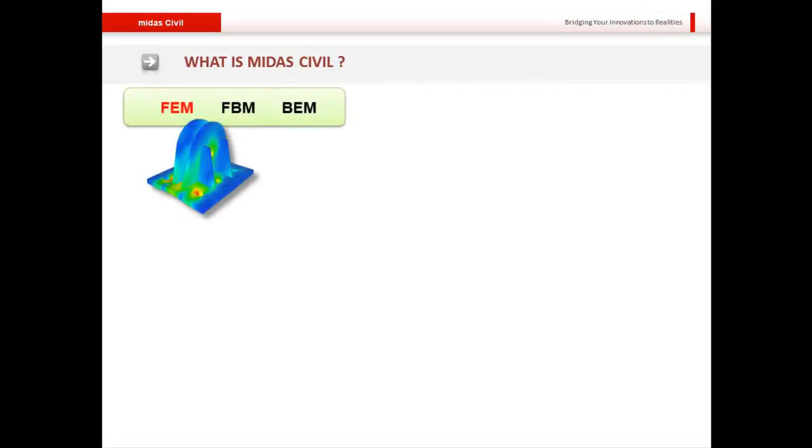So what is Midas Civil? Well, Midas Civil is a 3D finite element based package that is geared towards bridge engineers, but is by no means limited to bridge engineers. It's a general purpose product that can be used to create even models of structures like plant structures, tanks, silos, dams, tunnels, and many other such models. So even a geotechnical engineer can find some use for modeling and analyzing in Midas Civil itself. But of course, it is geared towards bridge engineers, and specific design functions are available for the bridge models only.

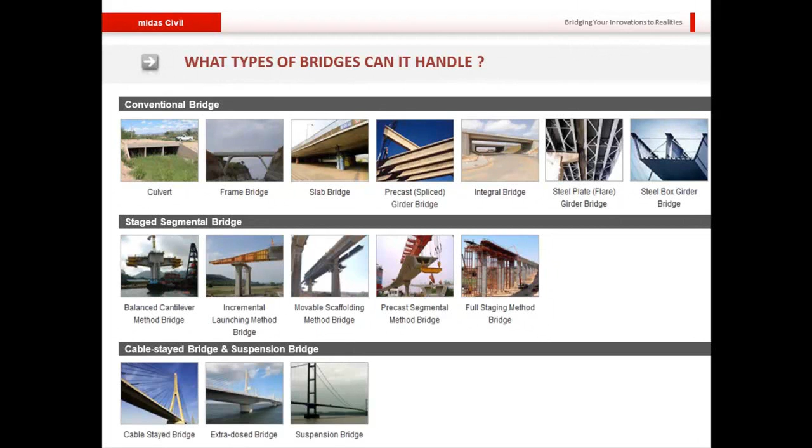So what type of bridges can Midas Civil handle? Well, it can handle quite easily the conventional bridge types like culvert, slab bridge, or girder bridge. It can even take care of staged segmental bridges like the balanced cantilever bridge, precast segmentally constructed bridge, or the full staging method construction for bridges. Each of these construction methods can be easily dealt with in Midas Civil. And finally, Midas Civil is also very adept at handling cable stayed, suspension, or extra dosed bridges.

So coming now to the modeling philosophy. First, I'll talk a little bit about initial sizing. Aside from loadings, the pylon and deck geometry as well as the orientation are driven simultaneously by cost as well as by aesthetics. Normally the loadings only play a part in finding the section dimensions. However, the orientation and overall shape of the bridge is usually driven by the aesthetic requirements.

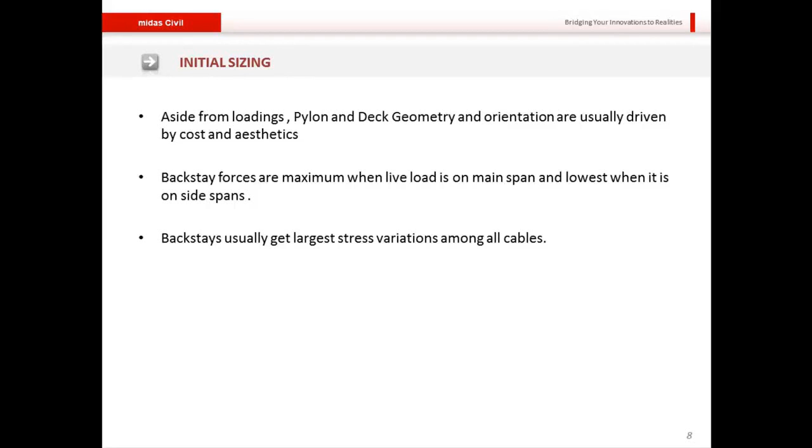Now coming on to the span length, or more importantly the ratio of side span to the main span. This ratio is determined by the backstay forces in the side spans, and the backstay forces are maximum when the live load is on the main span, and lowest when the live load is on the side spans. So the backstays usually get the largest stress variation among all cables, and therefore the span lengths have to be kept such that this variation does not exceed the fatigue strength of the steel material used in the cables.

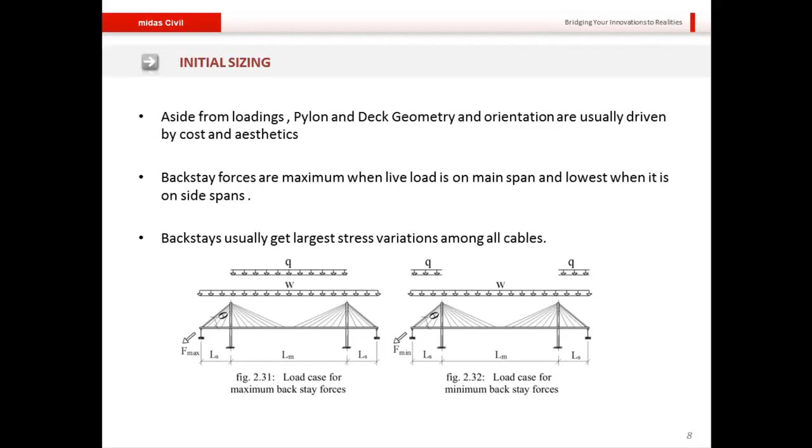This particular graph that I'm showing you is from Gimsing and Georgakis in 2011, where they investigated the relationship between the ratio of the side span and the main span, which they've plotted on the vertical axis, to the ratio between the live load and the dead load, which they've plotted on the horizontal axis. The value of zeta shown above the curves is the ratio between the absolute minimum backstay force to the absolute maximum backstay force.

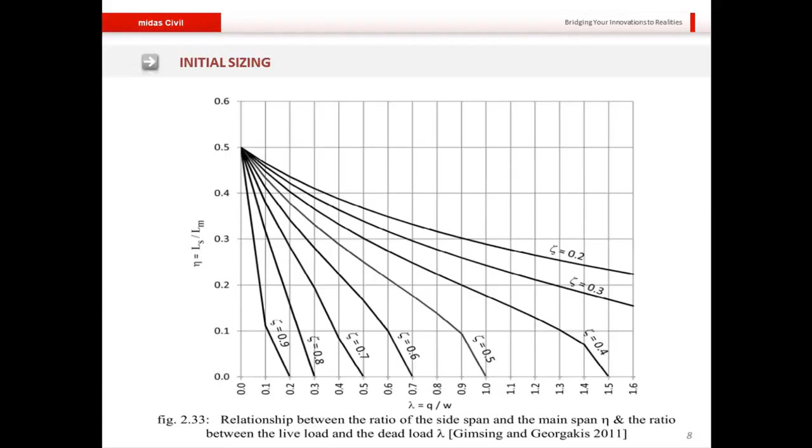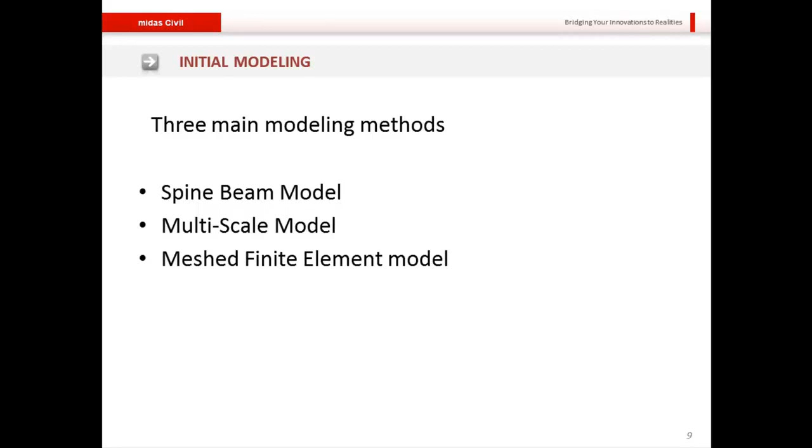Next we'll move on to initial modeling, and here there are three main modeling methods. First we have the spine beam model, we have the multi-scale model, and we have the meshed finite element model.

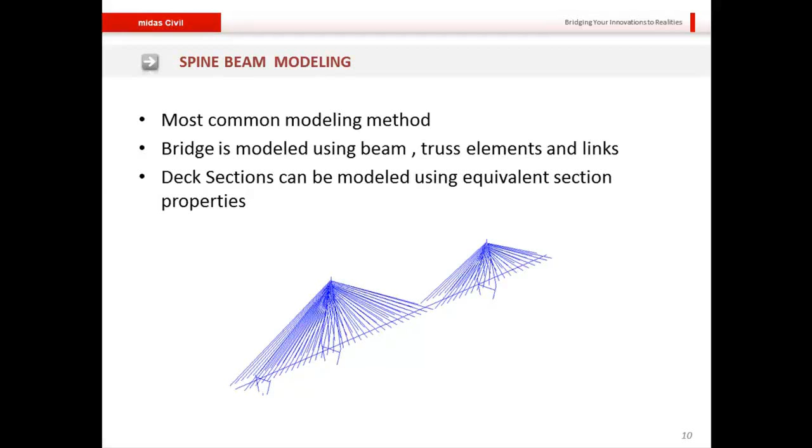So first let me talk about spine beam modeling. This is the most common modeling method, wherein the bridge is modeled using beam and truss elements and links that represent the bearings, and the deck section itself can be modeled using equivalent section properties. So for the deck element, you need not actually go for the entire geometry; equivalent section properties are more often sufficient.

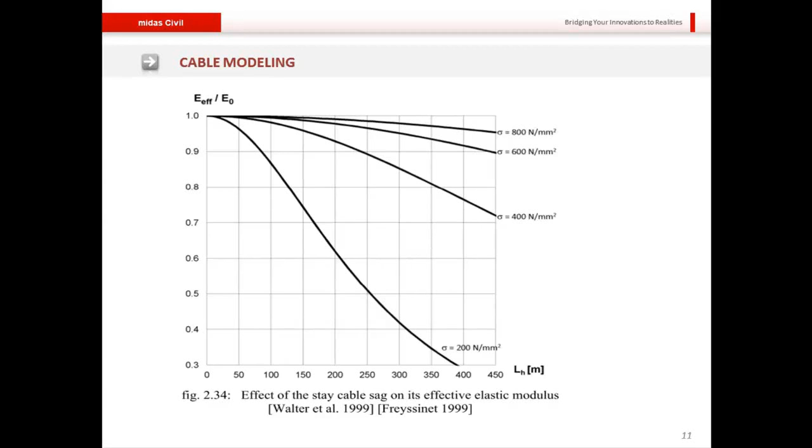Now this graph shows the variation of the effective stiffness of a stay cable relative to the horizontally projected length, which is related to its total overall length as well. So for the same amount of axial stress, the longer the cable, the lesser will be its stiffness, because of the more pronounced effects of sag.

Coming on to multi-scale modeling. In multi-scale modeling, we basically make use of different elements for creating a unified model of the bridge, so a combination of beam, plate, and solid elements is used. This type of modeling is more advantageous in that it can capture more accurate and localized results. However, in creating such models, one has to be careful and mindful of the different degrees of freedom for the different elements, so the interconnectivity between the beam, plate, and solid elements has to be carefully considered due to the differences in the degrees of freedom.

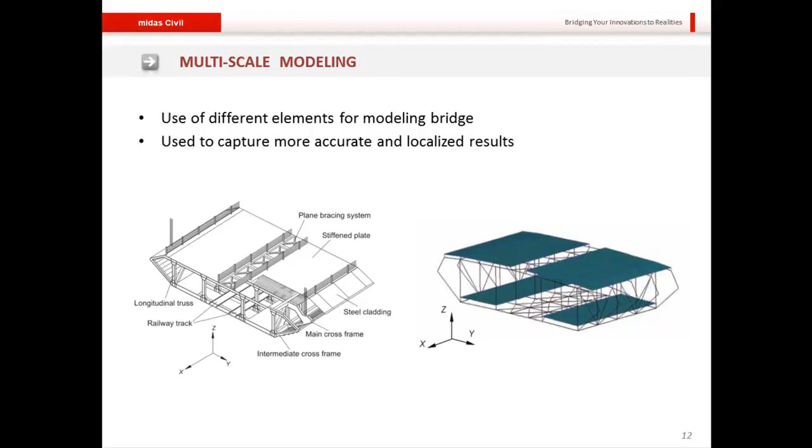Finally, we come to meshed finite element modeling. This is perhaps the most realistic modeling of all, and it gives more realistic structural responses with an accurate representation of local and global responses. But this is usually quite cumbersome to model for an entire bridge, so only certain critical portions are modeled and analyzed. In this image on the slide, you see a saddle clamp for the cables that were used in the Bonny River Bridge in Nigeria. This particular model was created using our advanced finite element software, Midas FEA.

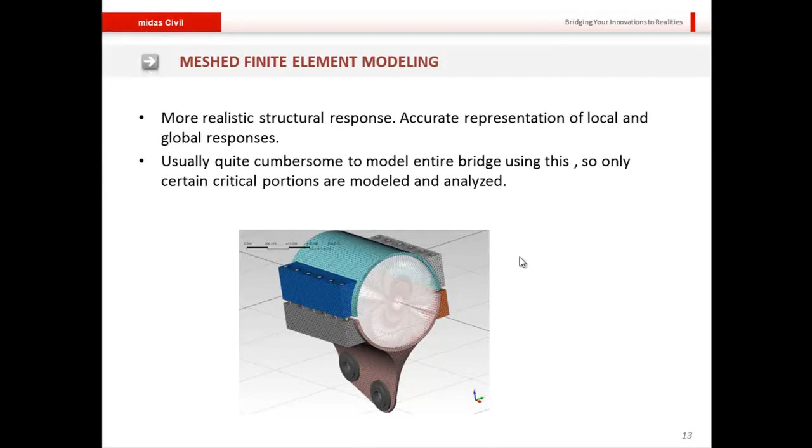Finally, let me talk a little bit about the support systems for conventional bridges. This slide shows the six common support systems that are frequently used for conventional cable stayed bridges. In each of these, you will notice that the deck is allowed to move longitudinally in one way or another, while most of the systems utilize expansion joints at the ends. Many others, for example cases D and E, have the expansion joint provided at intermediate points instead. So it really depends on the site conditions, the cost, and the aesthetic considerations, on what kind of support system the engineer would like to provide for his or her particular project.

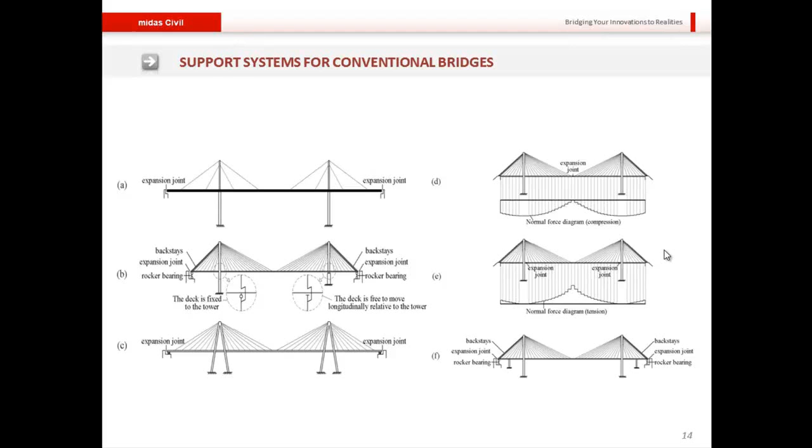Now, before moving on with the presentation, let me switch over to the software and show you how a particular cable stayed model can be made in our software Midas Civil. This is the interface of Midas Civil, and I'll open up the cable stayed bridge wizard. So this is the wizard itself, and now I'll begin the model.

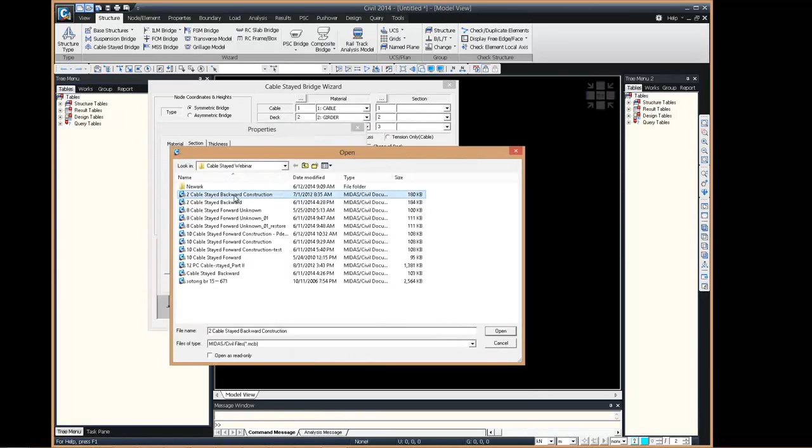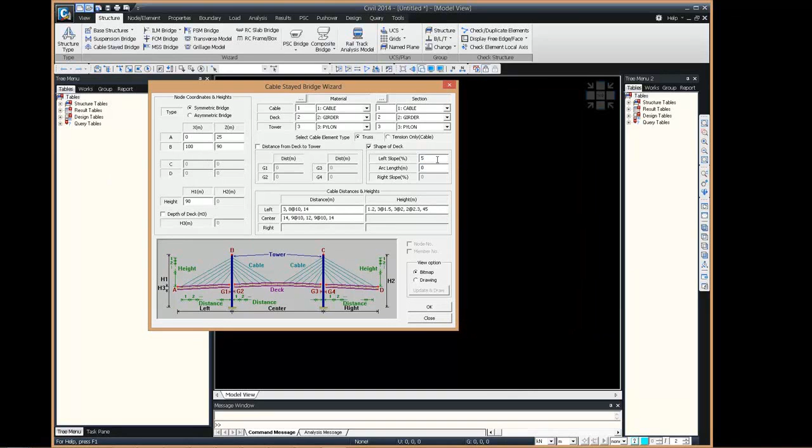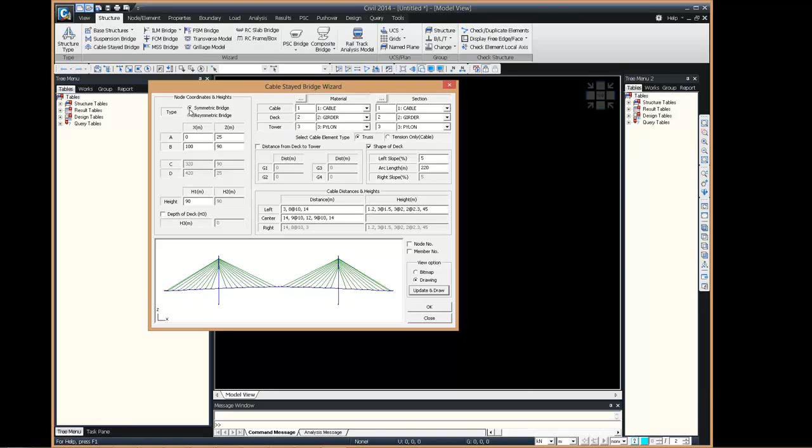So let me enter an initial slope of 5% and a total arc length of 220 meters. If I want to see how the model looks, I can just click update and draw, and it will show me how the model looks. Furthermore, if I want my bridge to be asymmetric, I can choose between the options. For now, let me just click OK, and my model is prepared.

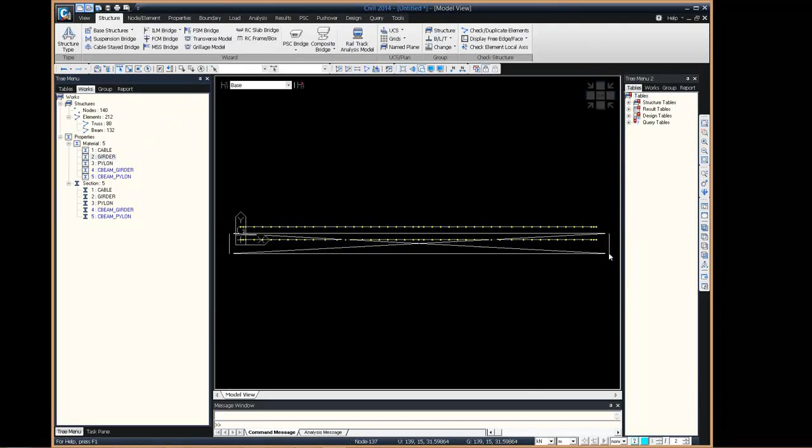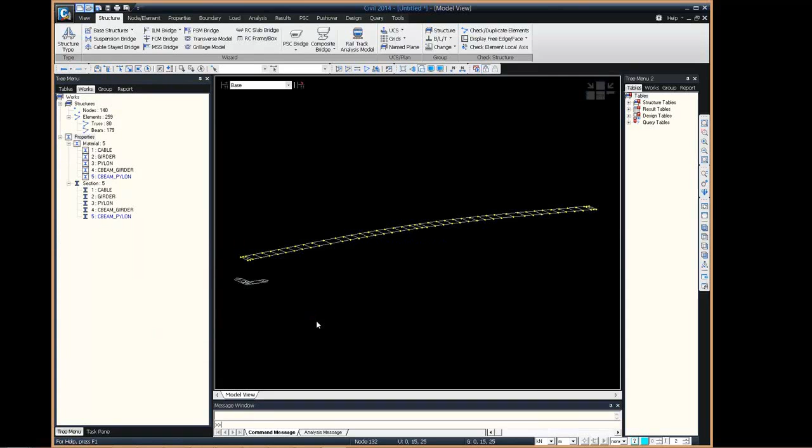Now what I'll do is create a copy of this particular model on its side. Going to Elements, Translate, I'm going to create a copy 15 meters apart. Now that I have my copy, I'll activate the deck parts and hide away the rest of the model, to create the cross beams. I'll simply extrude elements from these particular nodes to create my cross beams, selecting the cross girder material and the cross girder section property.

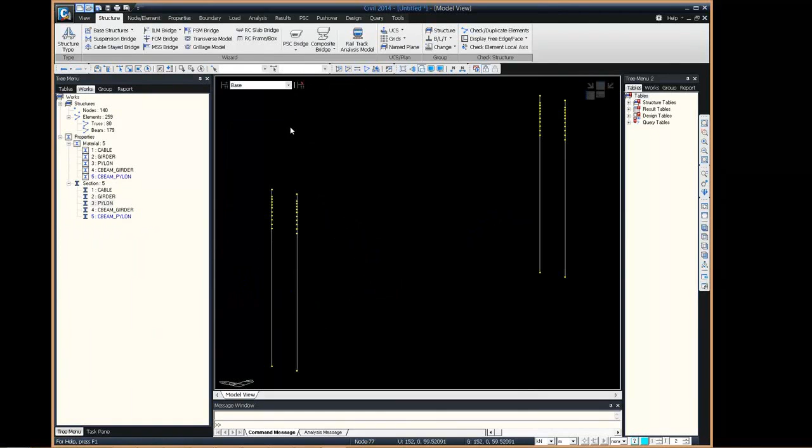With this, my cross beams have been prepared, and now I can go ahead and make modifications to the rest of my model. For example, let me activate the pier parts, and now if I want to create cross member elements at the pier locations, I can simply do so in this fashion.

So with this, the model is more or less complete at this point. You can make more modifications to it as well.

But for now, let me get back to the presentation.

So let me now talk about the analysis philosophy. This is the basic philosophy or workflow when creating and analyzing a model for a cable stay bridge.

First, we find the value of cable tension that will give the optimum deck profile for the final model. This is also known as the initial form finding or pretension value of the ideal state of the cable bridge. Once we have found this initial pretension, we do a backward construction stage analysis to find the cable forces during erection. In the backward analysis, we start with a completed model and keep on removing elements one by one in an order reverse to that of the original construction staging, and finally we get the member forces within the cable elements, which are basically the erection forces we need.

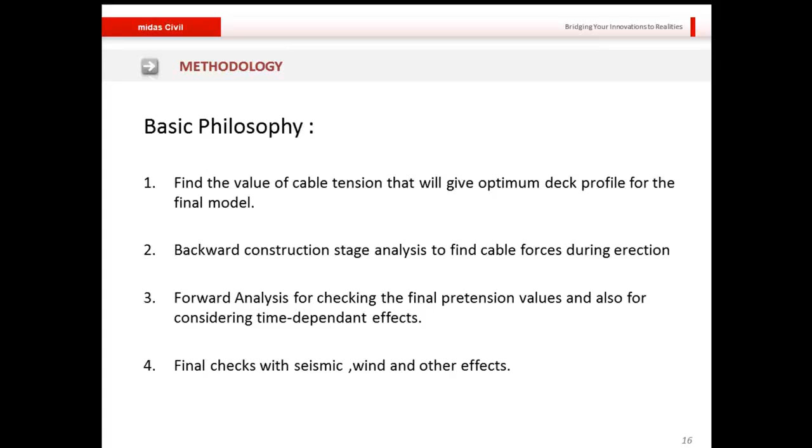The third step is usually a forward analysis for checking the final pretension values and also for considering the time dependent effects, and finally we do checks with seismic, wind and other effects.

So for the initial cable force finding, there are three basic methods: the continuous beam method, the bending moment envelope method, and the influence matrix method.

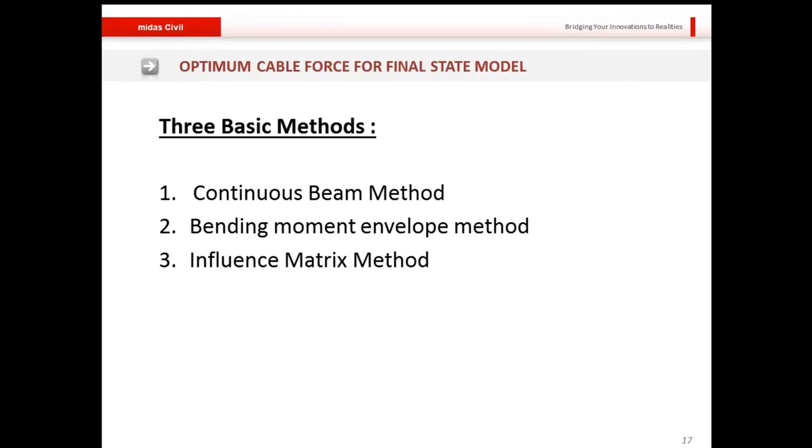Let me first talk about the continuous beam method. In this method, the points of connectivity between the cable and the deck are idealized as pin supports, and we find the reactions at each and every one of these supports. From these reactions we directly get the cable forces.

This method has some advantages in that the stay cable location basically helps eliminate creep in the vertical direction at nodal locations and also gives a very uniform displacement profile.

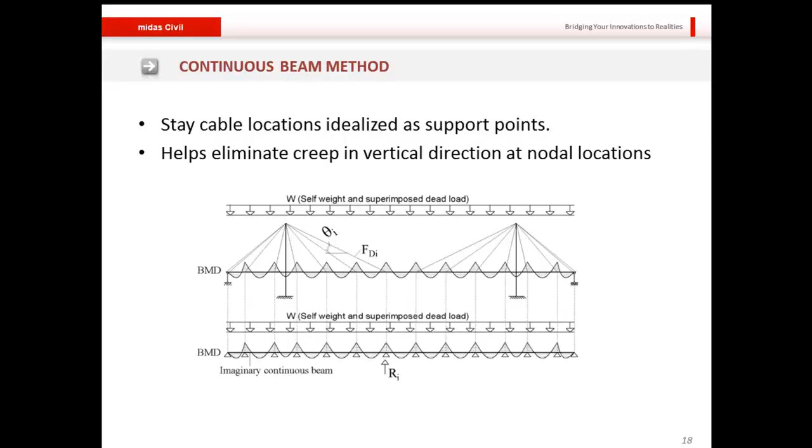Now, the bending moment envelope method was suggested by Svensson in his book Cable Stayed Bridges, 40 Years of Experience Worldwide. In his book, he mentions that the continuous beam method is not the best method for steel deck cable stayed bridges from the economic standpoint.

Normally when using the continuous beam method, you only apply the initial loading as dead loads. We do not initially consider the live loads. The live loads are later added once the initial pretensions have been found, added in the form of an envelope.

As you can see from this slide, in figure B, this is the profile that we would normally get if we consider the continuous beam method. But Svensson suggests that from an economic standpoint, we should consider the bending moment profile as that in part C. This profile can be achieved after tuning the cable forces such that the bending moment profile in the deck is as low as it can be, or within the lowest permissible limits.

So obviously this particular method would give more economic deck properties. However, at the same time, because we are increasing the amount of pretension in the cables, this will directly mean a higher amount of cable material needs to be used, and therefore for this method the cost of the deck has to be compared with the cost of the cables arising from the increased amount of pretensioning.

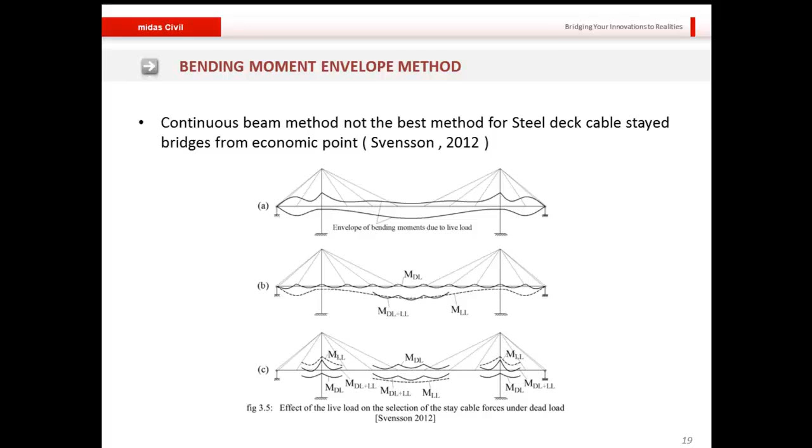And finally we have the influence matrix method, or as it is known in Midas Civil, the unknown load factor method. In the influence matrix method, we have a matrix of influence coefficients that are made to reflect the effect of loading in one or more cables on the rest of the structure. Any loading in one cable is obviously going to affect the entire structure.

This particular matrix reflects that behavior, and furthermore this matrix can be modified to accommodate different types of constraints, like displacements, reaction forces, moment profiles and influence coefficients, and those particular influence coefficients can then be directly used.

Furthermore, this method can and has been modified to incorporate a range of values. So for example, if you do not want to give exact values but rather a range of values, that can also be done using the influence matrix method, in which case an optimization technique has to be used to arrive at the most optimal solution.

And finally, once you have found your initial pretension values from any of the three methods, it may happen that these pretension values are not exactly falling within the desirable range for that particular material. So the cable forces may need to be tuned slightly, and in this case Midas Civil provides the cable force tuning option, wherein a user can directly tune the cables manually and see what effects that tuning will have on the entire structure.

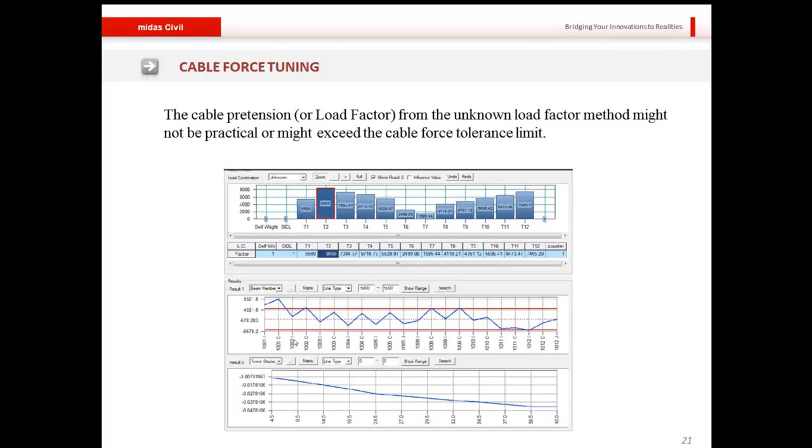So let me now switch over to the software and show you these particular features. Let me open up a pre-existing model file.

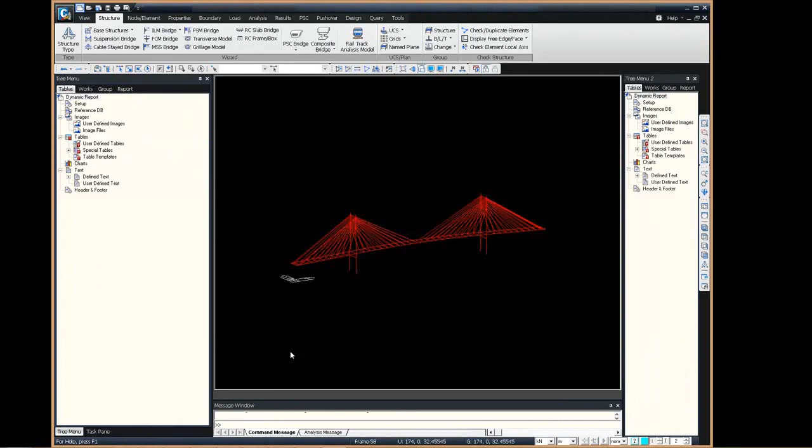Now this particular model has already been analyzed, and as you can see on the left side in the works tree, there are a lot of load cases that have been added, and many of these load cases are pretension load cases. Let me show you - each of these pretension values has a value of 1 kilonewton only, so basically we are just using the unit load method.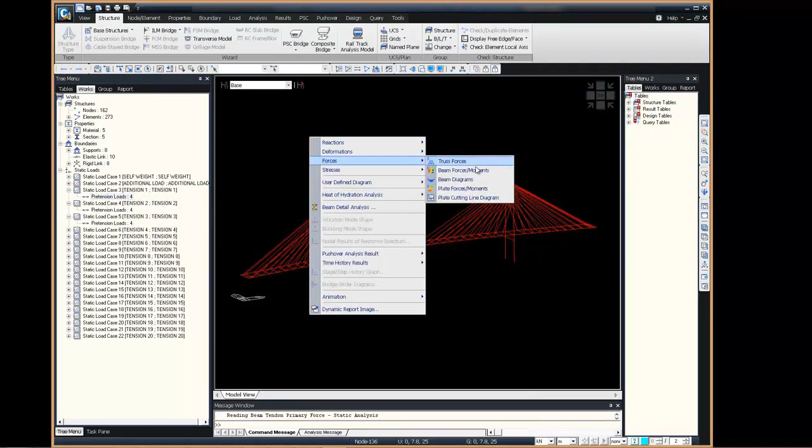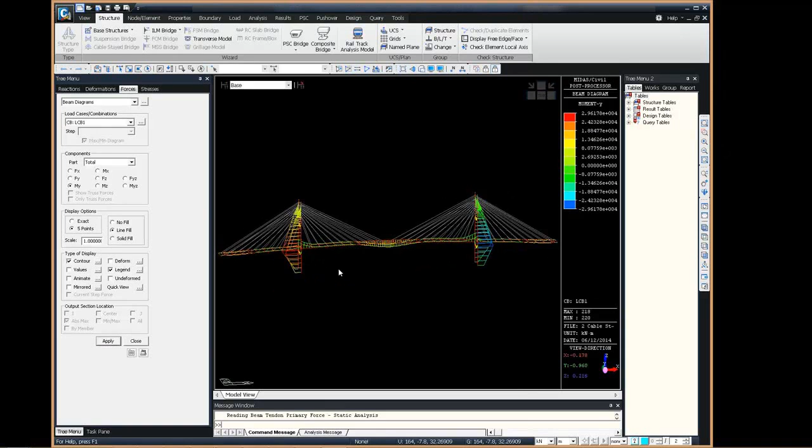Now let me show you some results. Let me show you the bending moment diagram for the combined case, that is self weight plus the unit pretension loadings. So here this is the bending moment profile that you get for the self weight load case combined with the load case for unit pretensions in all cable members. As you can see, at the midspan we have quite a lot of bending moment, and quite a lot of it at the pier locations as well.

Now let me go over to the unknown load factor method, or the unknown load factor function, and let me show you. So this is the unknown load factor function in Midas Civil. Here I have selected all of the pretension values that are required to be unknown. As you can see, the self weight and additional loadings are already known, so their factor is 1, whereas the unknown load factor is to be applied only on the cable pretension loads.

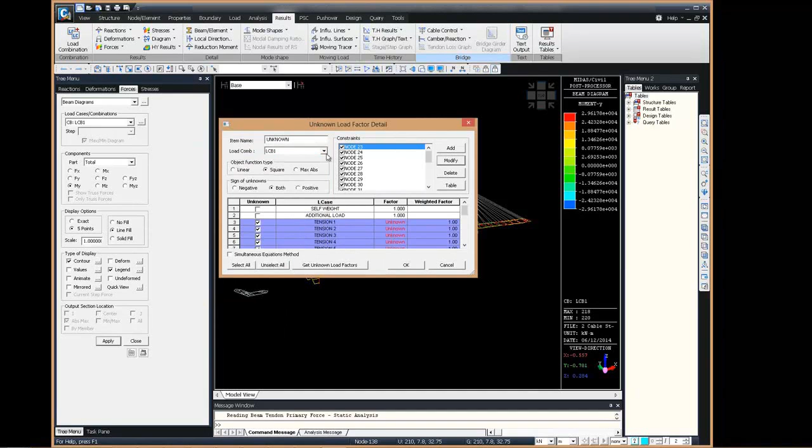Up next we have the constraints. As you can see, there are several constraints, node 25, 27 and so on. Each of these constraints is a displacement constraint, wherein it has been assigned with an inequality, so we have an upper bound and a lower bound. With this, Midas will calculate and find the optimal solution within these particular range of values.

So let me get the unknown load factors, and here you see the load factors that are to be applied to the pretension values. So these are the particular load factors that are needed for the ideal state.

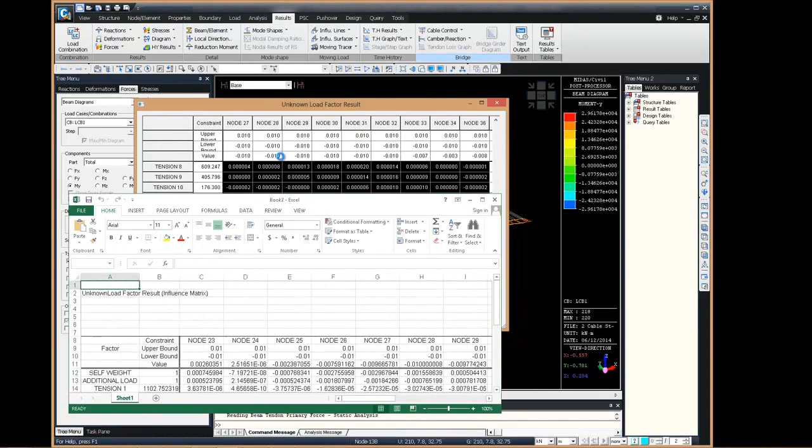Now if you want to check the influence matrix, you can even do that. So as you can see here, this is the influence matrix for this particular cable-stayed bridge model, and if you want, you can even create an Excel sheet. Let me show you - so this is the Excel sheet that is created and has the influence matrix values. So all the influence coefficients are there, and furthermore this Excel sheet has the equations written into it.

So let me show you - here you can see these are the equations that are written into it. So for example, if I modify any value, automatically the other values get affected. So this is something that can be easily added to one's project report.

Now let me just create a new load combination for this. Let's say modified, and now let me close it.

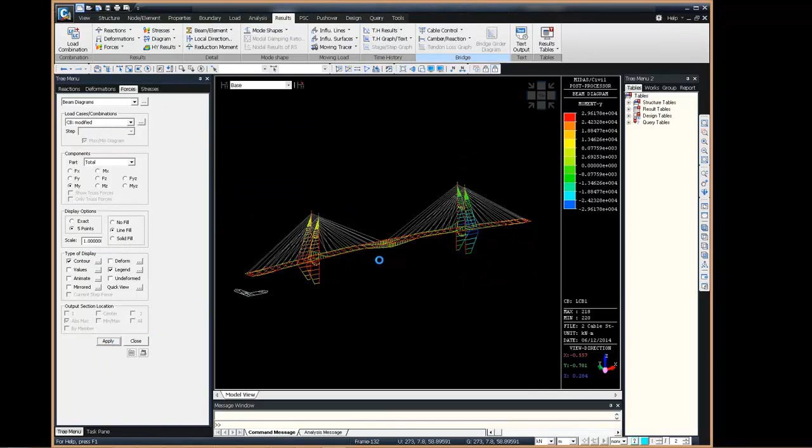Let me now show you the results for the modified load combination with the modified cable pretension values, and immediately you will notice that the bending moment profile has changed drastically. As you can see, the deck moments seem to have reduced quite a lot, and the value of the bending moment itself has also reduced. So this was using the displacement constraint.

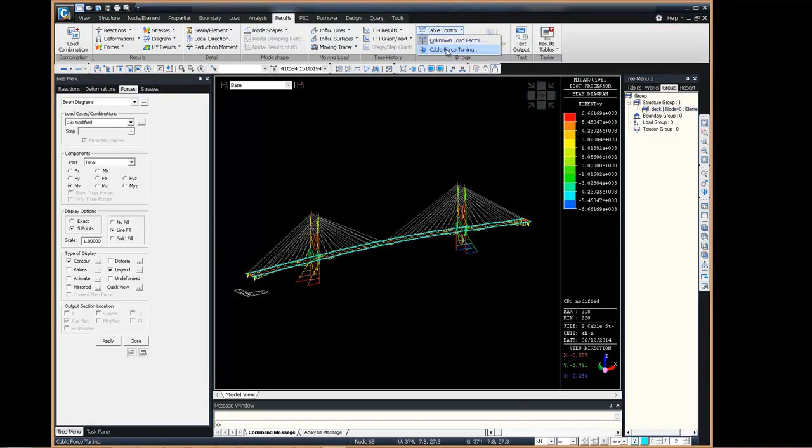Of course, one can apply other forms of constraints as well, depending on the requirement. Now, first let me create a structure group, and the reason I'm doing this will become clear shortly when I show you the cable force tuning option. So I'm just going to add the entire deck portion in my deck structure group, and now let me go over to the cable force tuning option.

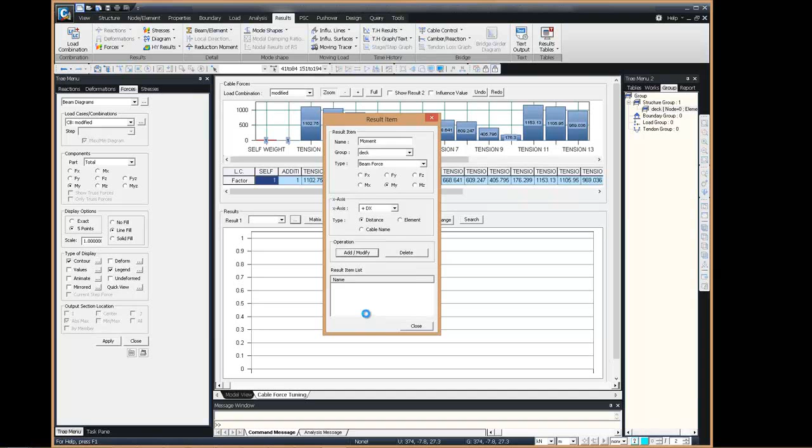So this is the cable force tuning dialog box. Let me select my load case as modified, and let me create a case or a group for my deck moments, and I'm going to choose the beam force, and as soon as I add it, I get the moment profile within my deck.

So this is the moment profile in the deck group, and here I can modify the cable pretension in real time and observe its effect, or the effect of the change in pretension values upon the entire model. As you can see, as I am modifying the cable pretension, the graph changes according to the influence matrix.

This is particularly useful if one wants to observe the effects of rounding off, since in the field it is rather hard to give exact decimal point pretension values. One may need to round values off. So here you can simply observe the final effect of this particular activity.

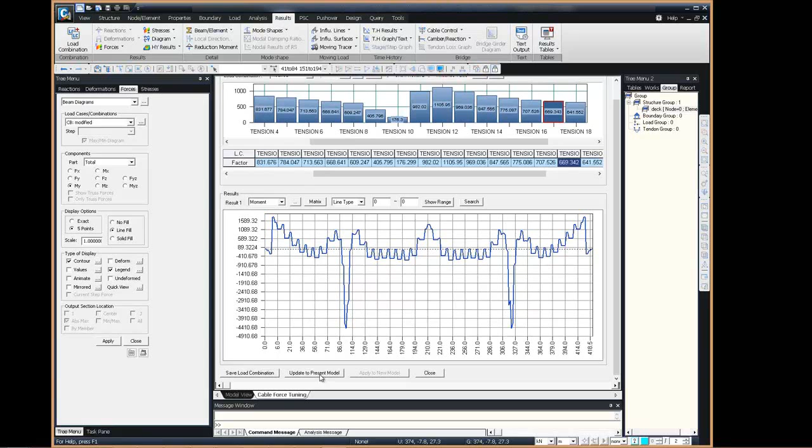So once you have finalized your forces, you can simply update them to the present model, and it will ask you to delete the analysis results. And now when you check on the pretension values, I'll be going to the tables, so they will not be unit values now, but rather the modified values that have been tuned using the cable force tuning option.

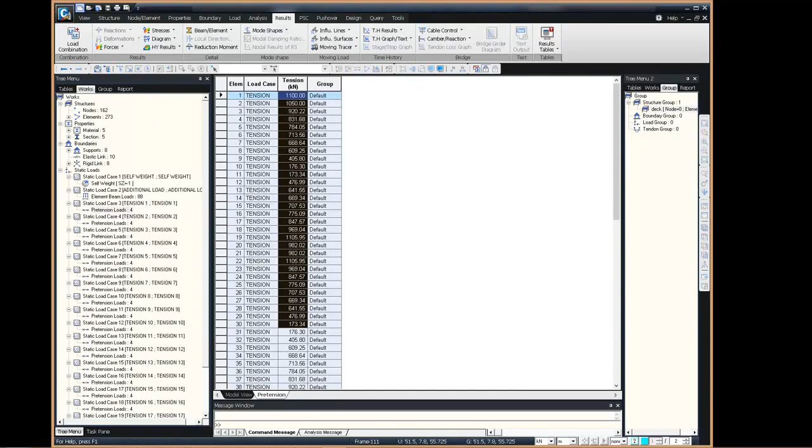So now let me get back to the presentation. So coming on to construction staging. In case of cable stayed bridges, we normally have two kinds of construction stage analyses.

First is the backward analysis, which is used to find the cable forces during erection. Now this does not account for the time dependent effects. And secondly, we have the forward analysis, which is used usually to confirm the backward analysis results when creep and shrinkage are not considered. And of course it can account for the time dependent effects as well.

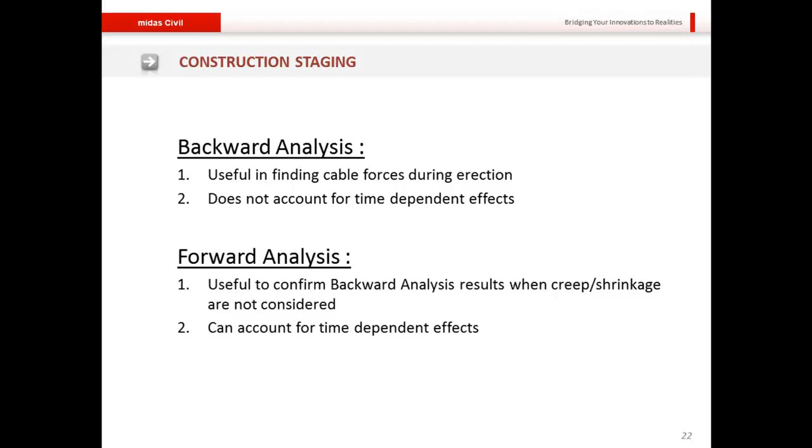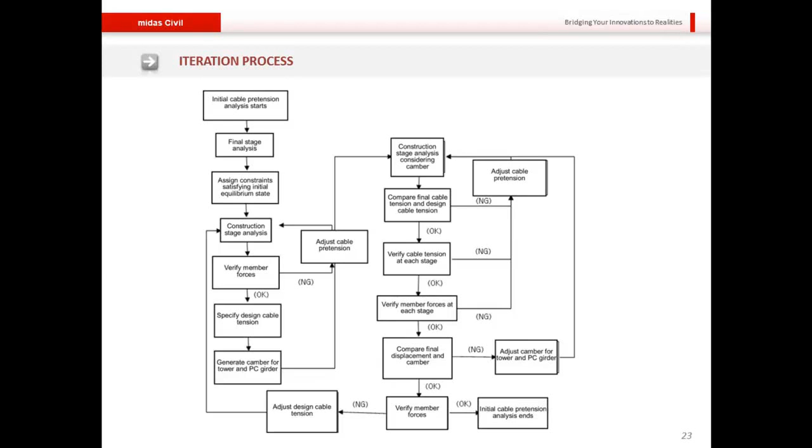So first of all, let me shift over to the software and show you the construction staging methods in Midas Civil. So this is the model of the backward analysis. Let me show you the progression of this model through the different stages.

So at the first stage we have the final model, and in subsequent stages we begin to remove the cable segment by segment until finally we reach the point where there are no cables installed. So here this is the progression in the model, and I'll just switch over to the final stage, wherein you can see there are no cables installed.

Now, in order to find the erection forces, we need to find the member forces within the cables at the time of erection.

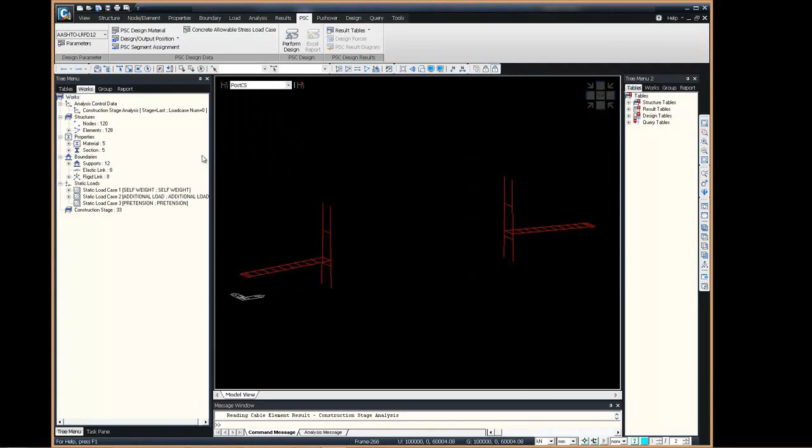So here let me switch over to truss forces, and let me start off with the last stage, that is CS30. This is the stage at which the first cable was installed, and this is the value of the cable force that needs to be entered for this particular cable.

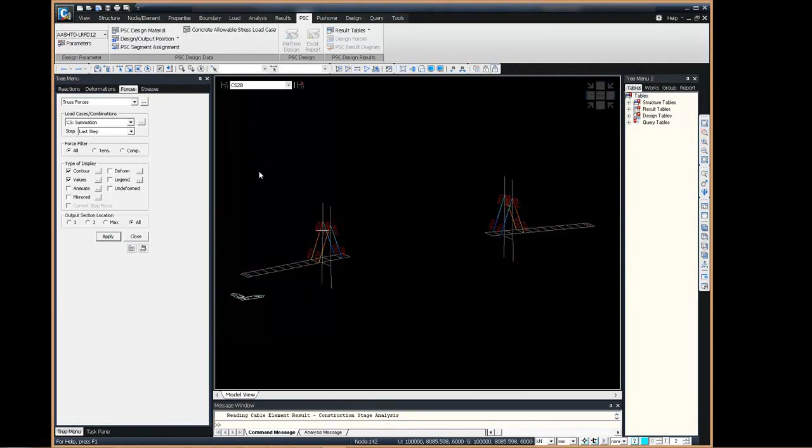Similarly, the value for the other cable, as you can see from here. Then for the third cable, installation forces can also be extracted from here, and in a similar fashion for the other cables.

Now let's talk about lack of fit force. When a segment is added to a bridge model during construction staging, that segment undergoes some deflection. This deflection changes the member forces in the cables, and during backward analysis we extract this changed cable member force information and use it as external pretension for forward analysis.

Midas Civil has a feature called lack of fit force, which essentially calculates the amount of force needed to push the deflected segment back to the ideal state position. Thus, in effect, this feature removes the necessity of backward analysis, since the lack of fit force results can directly be added to the initial pretension force after analysis, and the same model can then be reanalyzed. So what this means is, basically, if you use the lack of fit force function, you need not do a backward construction stage analysis. So let me shift over to Midas Civil and show you how this can be done.

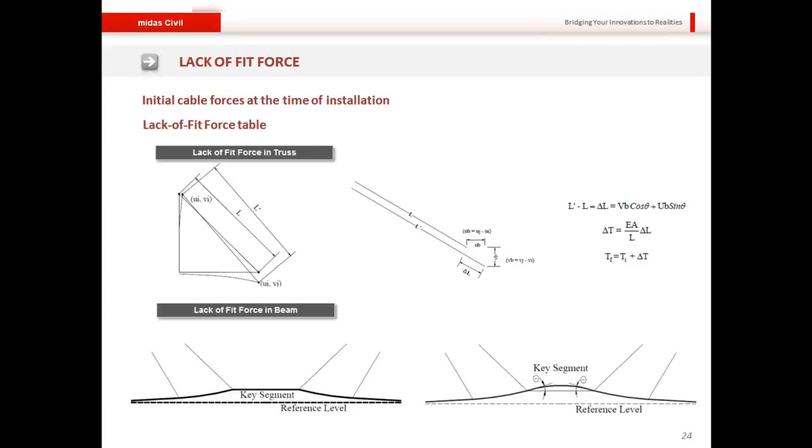So in this new model that I've opened, I will demonstrate to you the lack of fit force feature. First of all, under the construction stage analysis control.

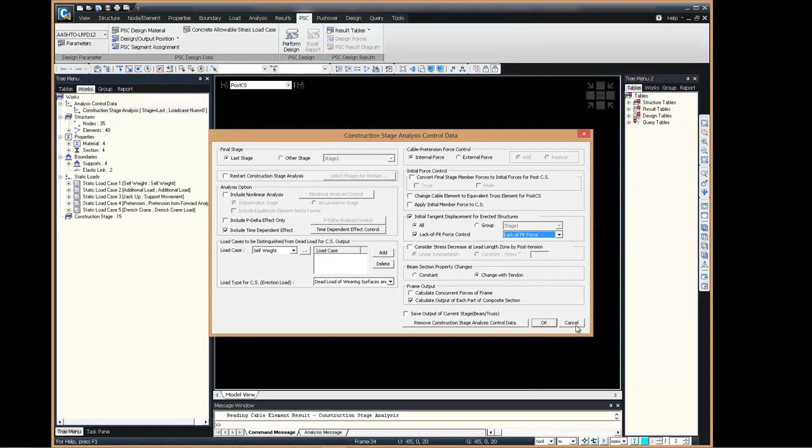Here we have the initial tangent displacement for erected structures, and this is the lack of fit force activation. From here this feature gets activated, and here I have already defined a structure group called lack of fit force. Let me go ahead and show you what are the elements under this particular group.

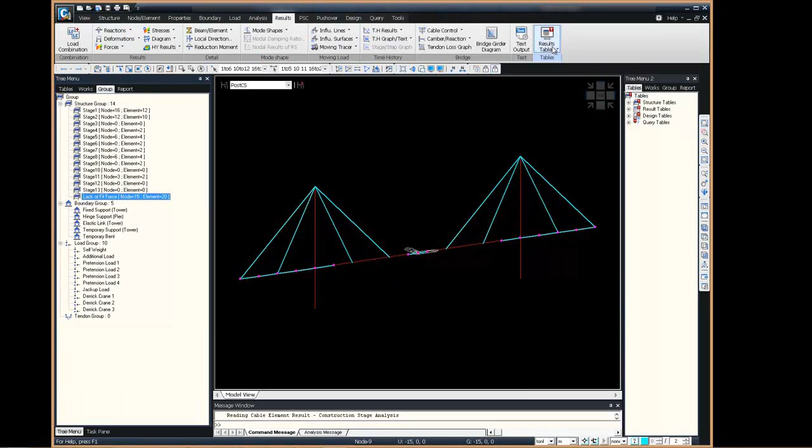Here you can very clearly see that the elements are basically all the cables in this model and some parts of the deck, as well as the key segment. So basically wherever the jacking up needs to be done, those parts have been included in this particular group. Now let me show you the results of the lack of fit force analysis.

Here these are the results for the cables, and as you can see, Midas gives you very detailed results on what is the actual lack of fit force and what is the summation of these lack of fit forces with the initial pretension values. So you can directly use these values for the forward analysis.

Now similarly, we also have lack of fit force values for the deck sections. Here, as you can see, we have the lack of fit force. These are the deck sections, these are the key segment deck sections, and as you can see, the program gives very detailed values on how much.

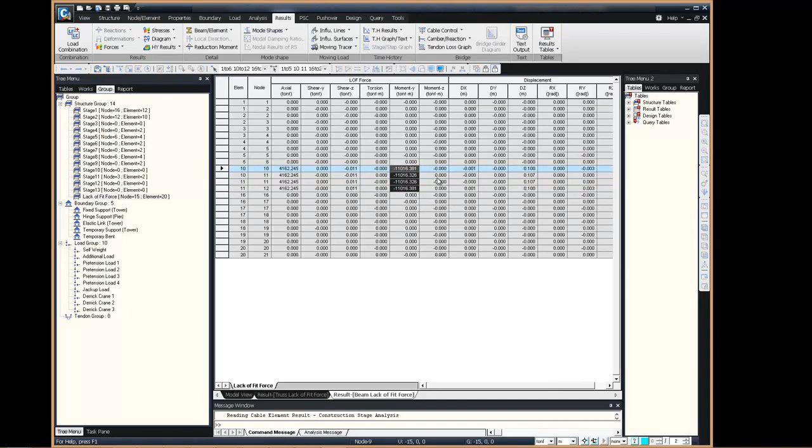Now coming on to Camber calculation. Camber calculation is one of the many requirements for cable stayed bridges, and in fact it is one for nearly all kinds of bridges. For cable stayed bridges it is particularly important because the cable forces are very sensitive to the deflections, and therefore it is the engineer's prerogative to achieve as close to the ideal state once the construction is done as possible.

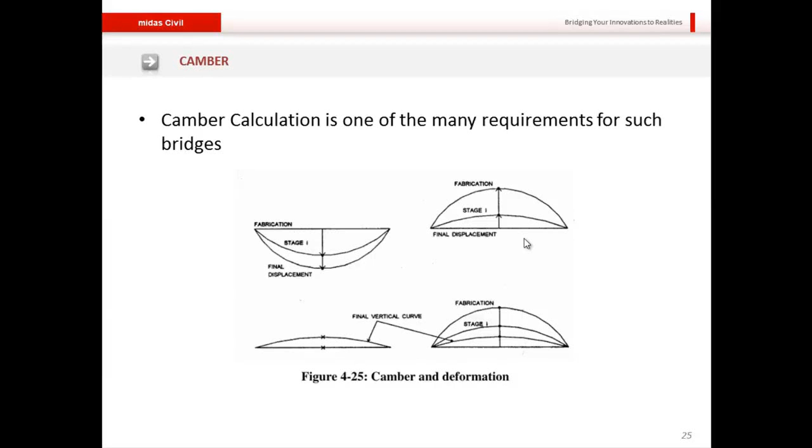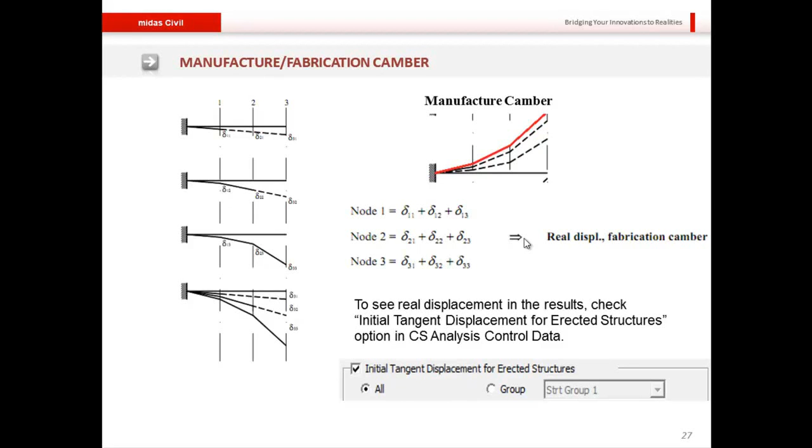This particular slide shows the calculation of construction camber in Midas Civil. The net displacement shown by the deflected shape that Midas Civil shows by default is that of the construction camber itself, and Midas can also show you the manufacturing camber that is shown as the real displacement, which is activated upon using the initial tangent displacement option. So let me shift over to the software and show you this feature.

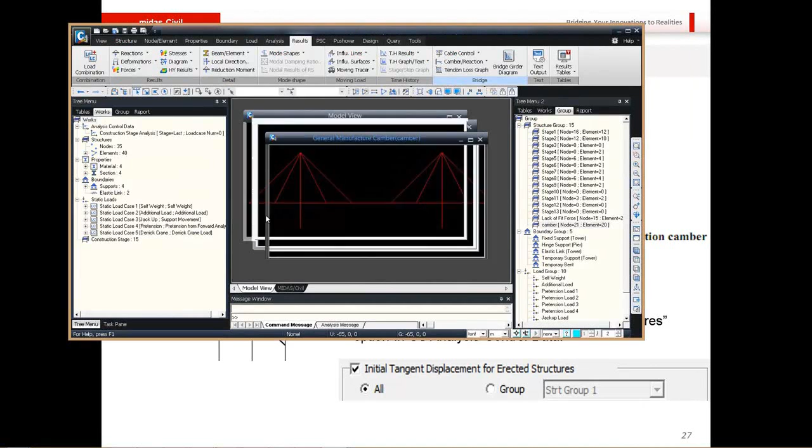So first I will add a structure group, and now let me calculate the camber value. I'm calculating for the summation load case. Here you can see this is the general manufacture camber across the different nodal points of the deck, and this is the construction camber.

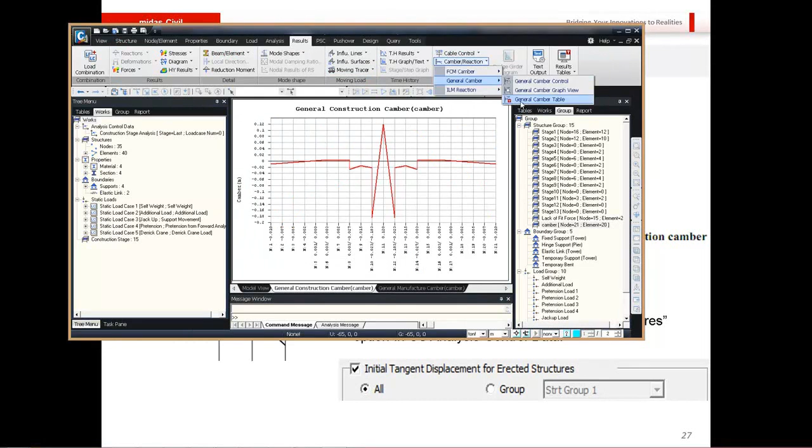You can even get the camber value in tabular format. Again, choosing the summation load case, here these are the tabular values at different nodal points.

Now let's discuss nonlinear effects. There are three major nonlinear effects to be considered in cable bridges. First is the sag effect of cables. The second is the P-delta effect or the second order effect, and third being large deformation or third order effects.

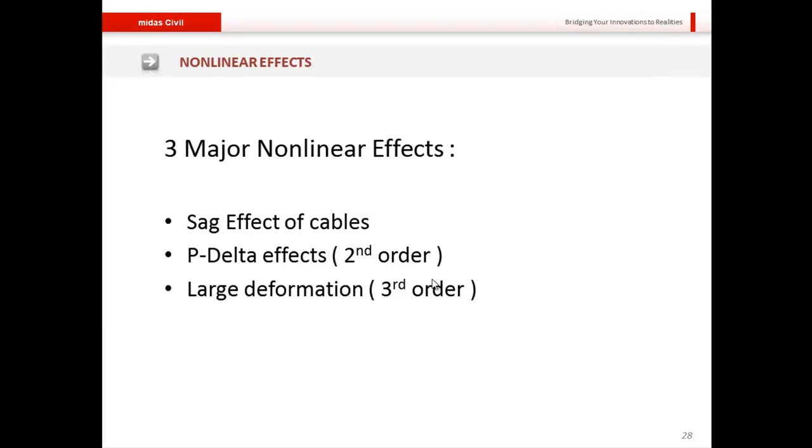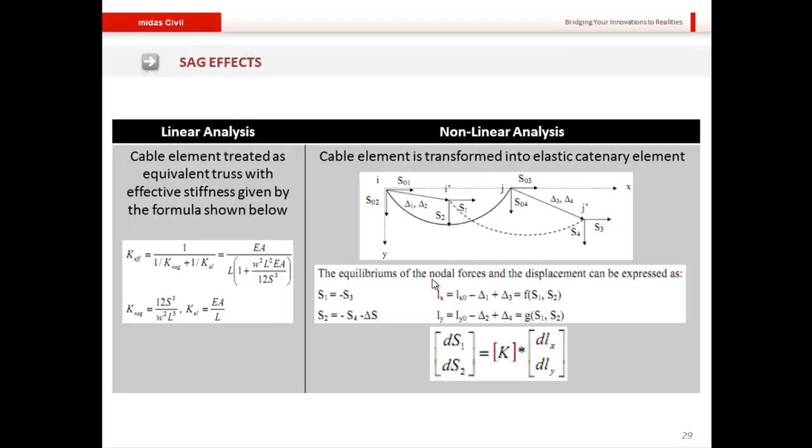Coming to the second order effects. For short to medium span bridges, deflections are quite small, so the second order effects can be limited to the live load effects only. This means the initial pre-stress calculations and the dead load themselves can be done considering only the first order effects, while the P-delta effect needs to be taken only when the live load is considered.

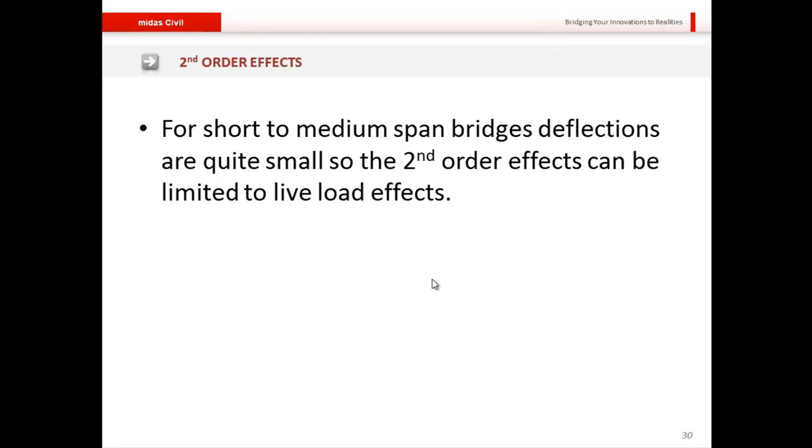Now for long span bridges, however, these should be considered for both construction and final stage calculations, particularly because the second order effects can even affect the ideal state itself.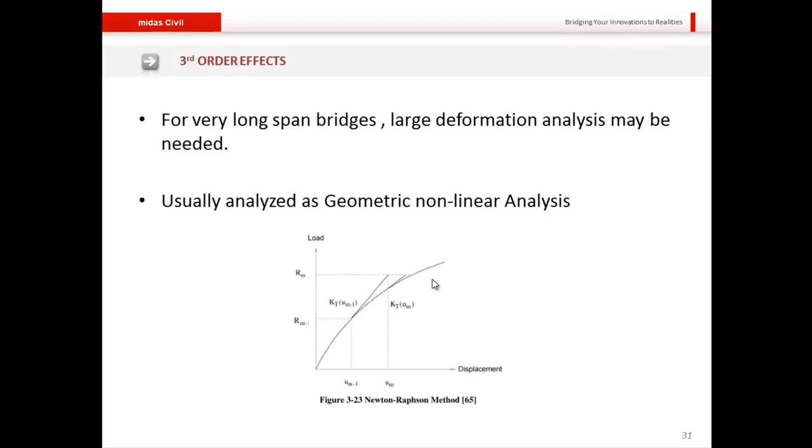Regarding P-delta nonlinear analysis in Midas Civil, you can activate these features from the construction stage analysis control, where you get different options. Depending on your requirement, you can do a complete nonlinear analysis, or an analysis considering P-delta effects only. If you consider the P-delta analysis only, you will get options for controlling the iterations and the convergence criteria.

If on the other hand you decide to go for a nonlinear analysis, you will get the option to choose between the independent stage and the accumulative stage. The independent stage is used for backward analysis, wherein the previous stage should not affect the results of the current stage. So if you're going backwards through time, the previous stage would actually be the stage ahead in real construction. The accumulative stage is used in case of forward analysis, wherein the previous stage does affect the current stage.

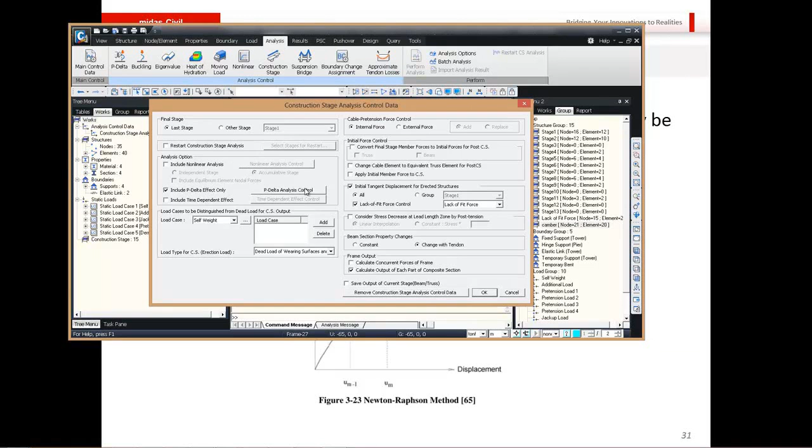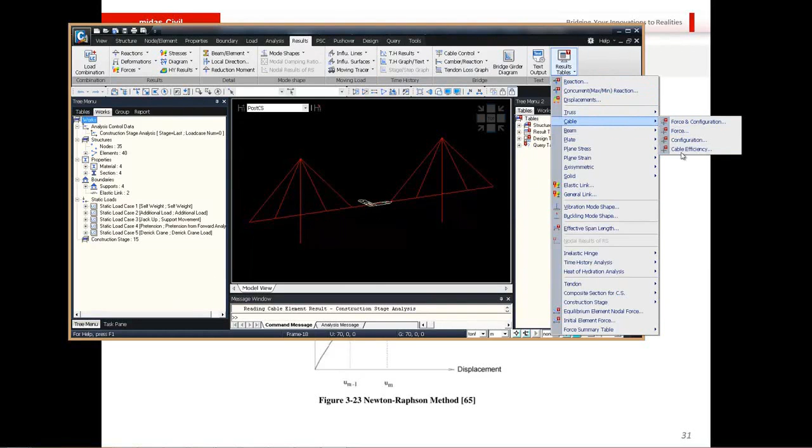So right now let me show you selecting P-delta analysis. This is a different file that I have opened, wherein the results file has already been analyzed together with P-delta effect, so the results will reflect the P-delta effect as well - all the member forces, for example, the member forces for the cables, etc.

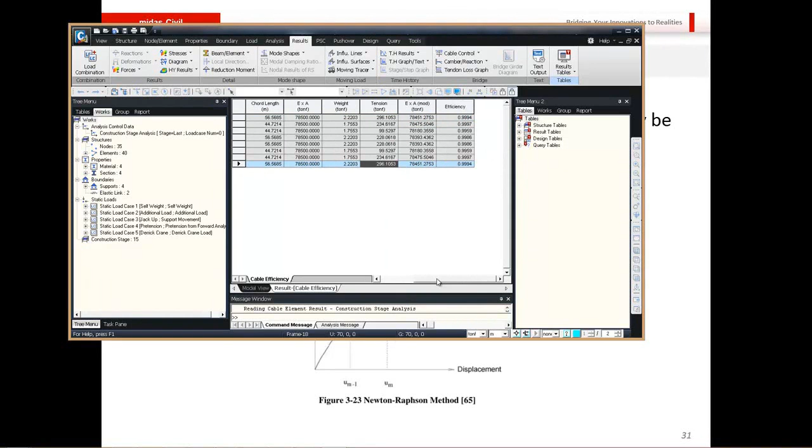Now let me also show you one feature called the cable efficiency feature. With this particular feature, you can directly get a measure of how efficiently a cable is acting, and the cable efficiency is basically a measure of its current utilized stiffness to that of its total material stiffness. With this result, you can very easily check how much stiffness is being utilized for each and every cable.

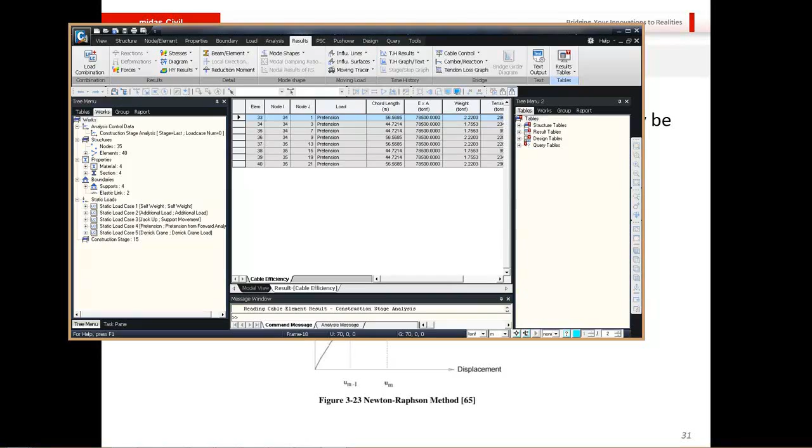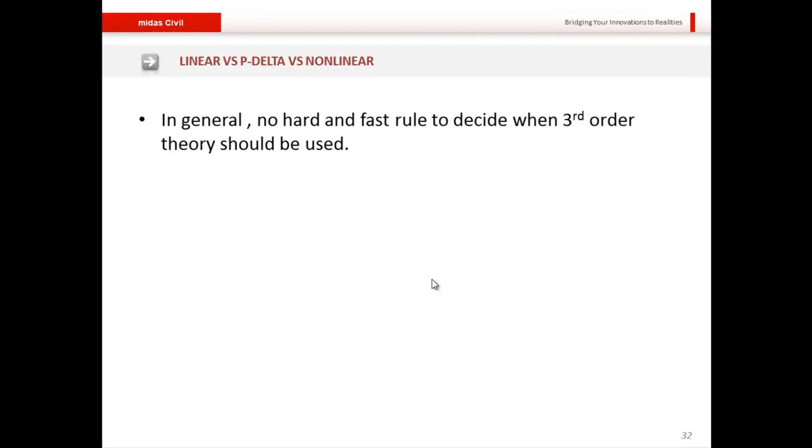One question that may come to you is: what is the cutoff? When should we use linear, when should we use P-delta, and when should we use nonlinear analysis? In general, there are no hard and fast rules to decide when a third order theory should really be used. For the most part, engineers agree that the second order effects are quite sufficient.

However, for short span bridges, Virlogeux and others have suggested that the dead load distribution be first analyzed as first order, and second order checks be done only for live load computation, as I had mentioned before. Furthermore, Wang and others have suggested that for main spans beyond 600 meters, third order theory is recommended. These are just a few researches that I have cited here. Other researchers may have other opinions, other engineers may have different opinions depending on their experience. So it really all boils down to the engineer's opinion based on his or her particular project.

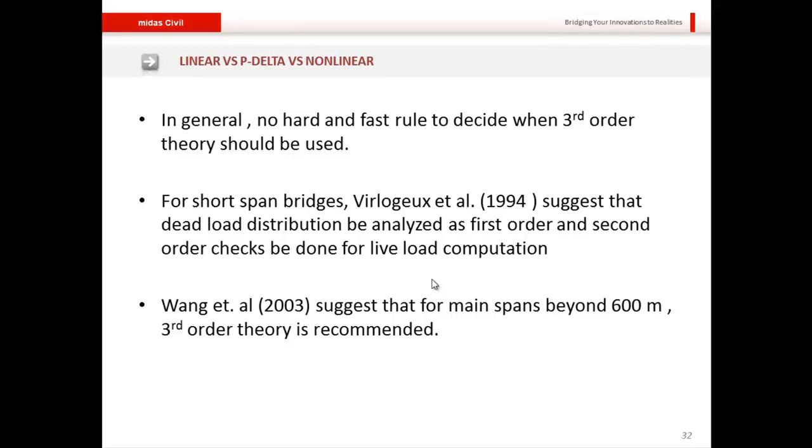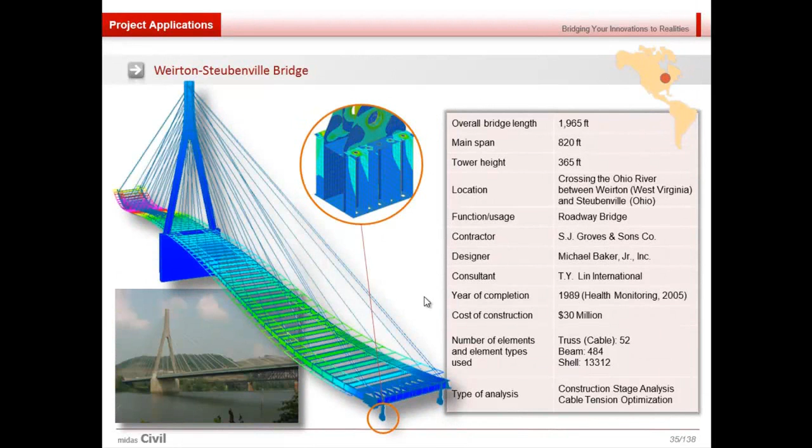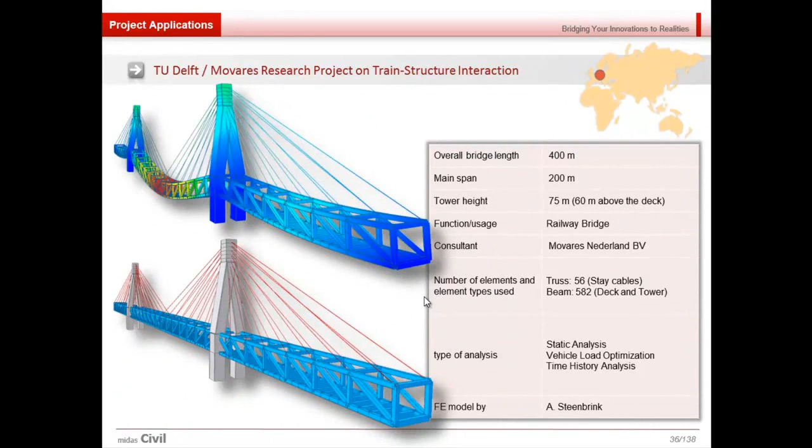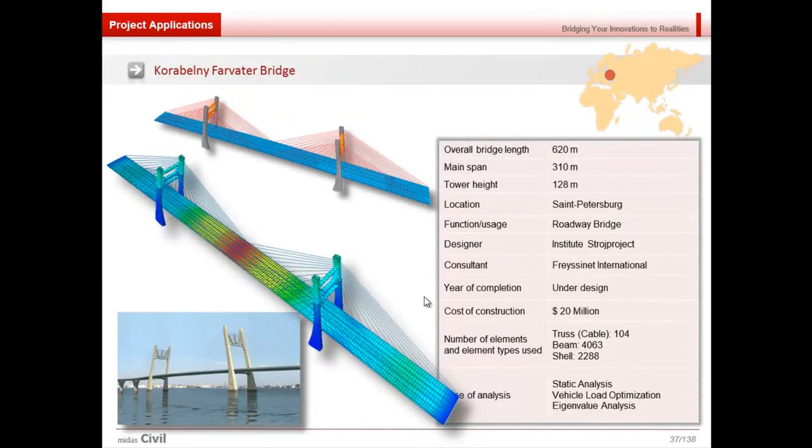The Incheon Second Bridge, which is currently the 5th longest cable stayed bridge in the world. It was designed by Seoyeong Engineering and Chodai Company Limited, and it was analyzed for construction stage analysis with time-dependent effects, geometric nonlinear analysis, and vehicle load optimizations.

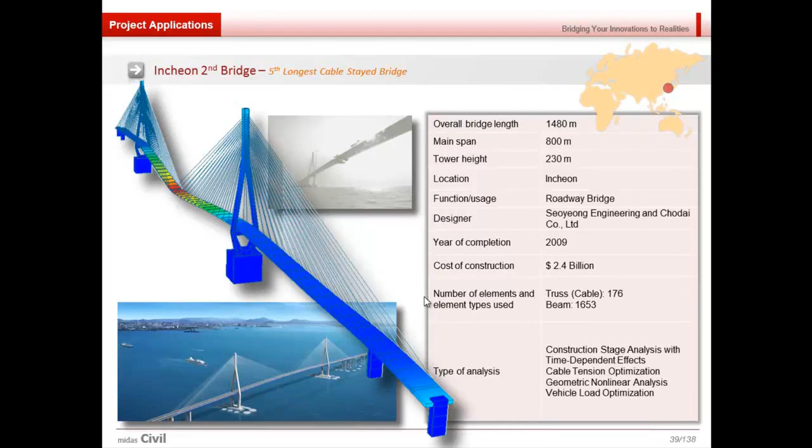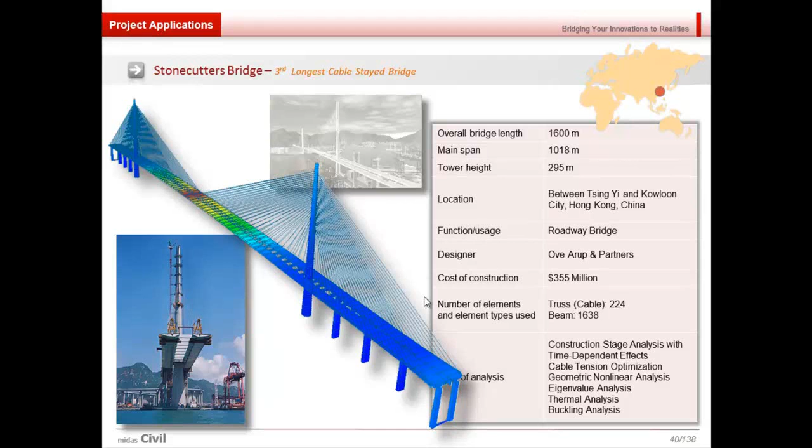We also have the Stonecutters Bridge, which is the 3rd longest cable stayed bridge in the world, with a main span of over a kilometer long. This was designed by Arup and partners, and it was analyzed for geometric nonlinearity, thermal analysis, buckling analysis, eigenvalue, and construction stage with time-dependent effects.

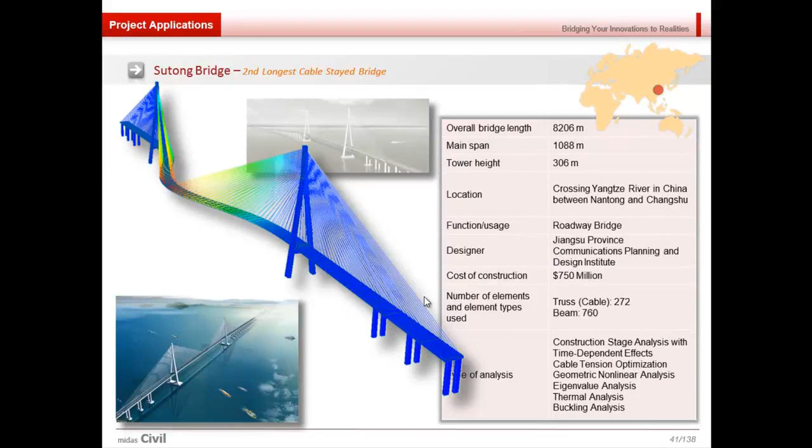And lastly, but not least, we have the Sutong Bridge, which is the 2nd longest cable stayed bridge in the world today, with its main span of again over a kilometer long, just about 70 meters more than the Stonecutters Bridge. It was also analyzed for similar effects as that for the Stonecutters Bridge.